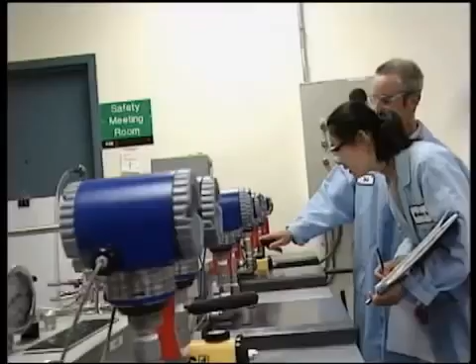One company stands above the rest in creating the technologies and the products needed to solve these challenges. My name is David Koch, and I'm the president of Koch Membrane Systems. For almost 40 years, KMS has been a leader in developing new membrane technology for liquid filtration in many different industries. Over the years, we have grown to a size approaching $100 million per year in sales and 500 employees.

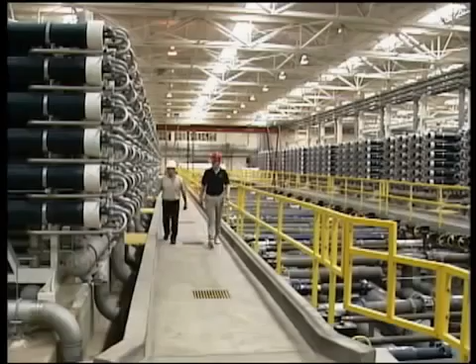In the mid-1990s, we identified water and wastewater treatment as a key growth area and invested accordingly, both through in-house research and development and through acquisition. KMS has a long history of providing innovative and highly economical products for water and wastewater treatment.

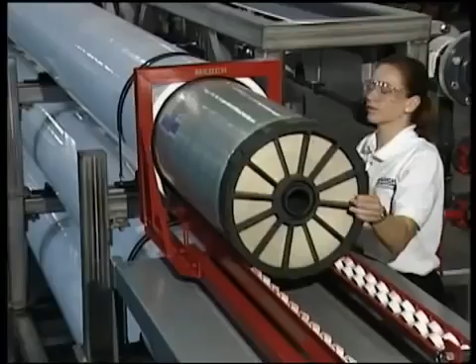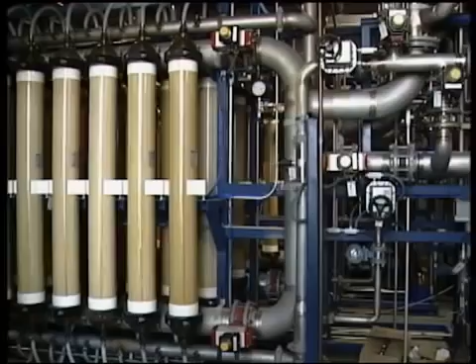For example, we recently introduced the Mega Magnum reverse osmosis element, which significantly reduces the cost of providing purified, desalinated water. Our hollow fiber ultrafiltration membranes, developed some years ago, treat raw water to provide safe drinking water and are also used to polish industrial wastewater for reuse.

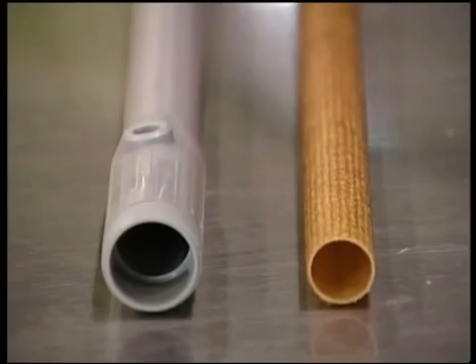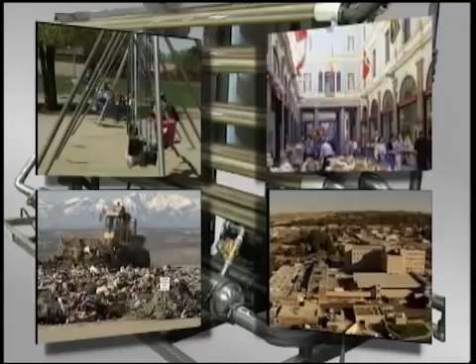KMS's well-proven tubular membranes are the membranes of choice for many challenging industrial wastewater applications. Since the 1970s, our tubular modules have been used in membrane bioreactors, or MBRs, to treat domestic waste from schools, office buildings, and shopping malls. We've also supplied tubular MBR membranes for landfill leachate treatment.

To meet this need, in late 2004, KMS acquired Puron, a young company based in Aachen, Germany. Puron was founded in 2001 by engineers associated with the University of Aachen, which is known for its development of membrane technology. In Puron, we found a company that has huge synergies with KMS.

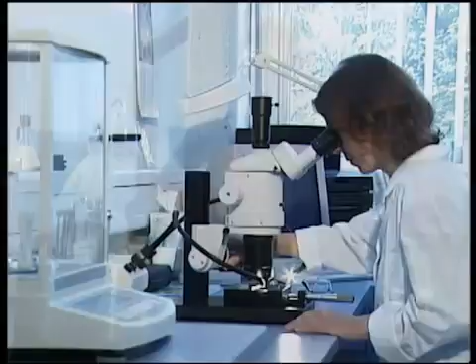The Puron technology is outstanding. It uses a submerged hollow fiber membrane module whose design is protected by a large number of worldwide patents. I believe it offers major advantages over other products in the market today. As will be explained in the film which follows, the Puron single header module design is much less subject to plugging and fiber breakage and uses far less energy than the double header designs. It is a proven concept with many commercial systems operating successfully.

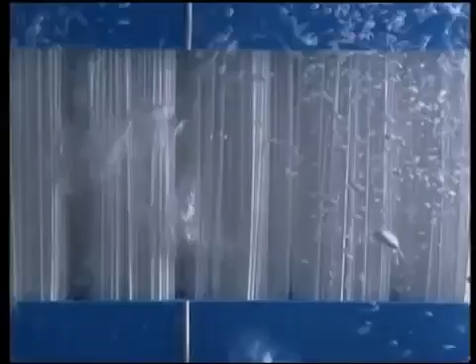With the Puron MBR product for wastewater treatment, the Mega Magnum RO element for saltwater desalination, and a hollow fiber ultrafiltration cartridge for raw water purification, KMS is the only filtration company in the world with a full range of membrane products for municipal and industrial water and wastewater treatment needs.

Our sales force is fully trained to discuss the performance of all of these products. We hope that you will enjoy this film, which explains the many benefits of the Puron technology and shows why we believe it is certainly the most advanced and economical technology for purifying municipal and industrial wastewater.

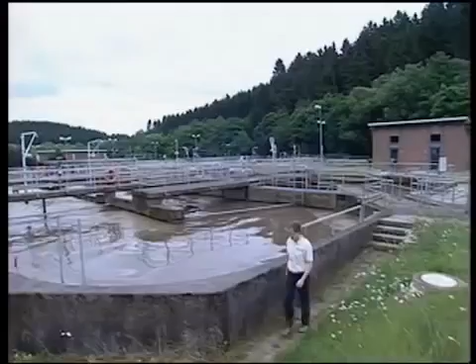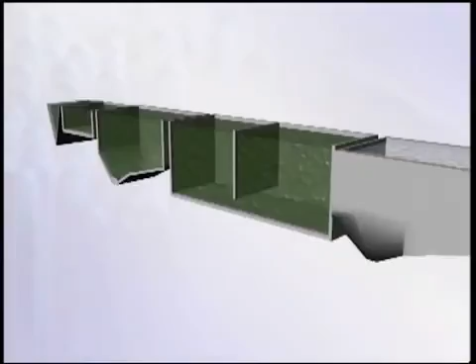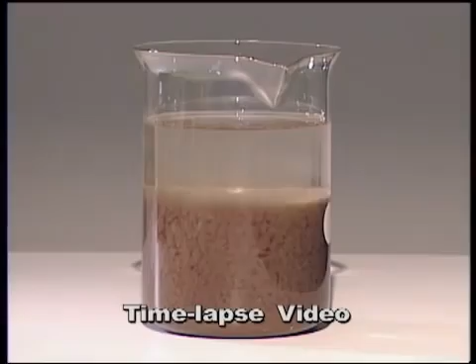Wastewater treatment needs are enormous. Wastewater treatment will play an incredibly important role in accommodating future water demand. Conventional wastewater treatment consists of 3 steps: primary treatment, biological treatment, and solids-liquid separation. The crucial part of the process is the solids-liquid separation. With a conventional sedimentation process, there is often insufficient removal of bacteria and suspended solids. For example, in 1 liter of typical secondary effluent, there are 10 million bacteria, which can be difficult to remove.

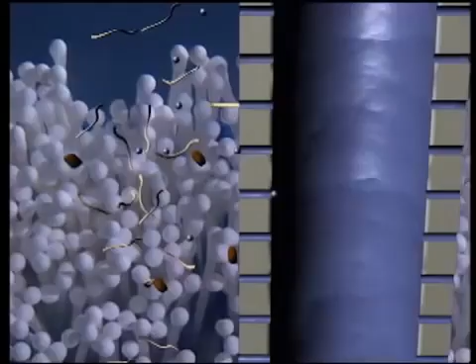The solution is here. Membrane technology has led to a new revolutionary concept in wastewater treatment. Membranes act as a barrier to bacteria and suspended solids to produce a low turbidity water with very low bacteria counts. Membrane bioreactors, simply called MBRs, offer the optimum solution. The membrane modules are submerged in the activated sludge to combine the biological step and the solids-liquid separation into a single process.

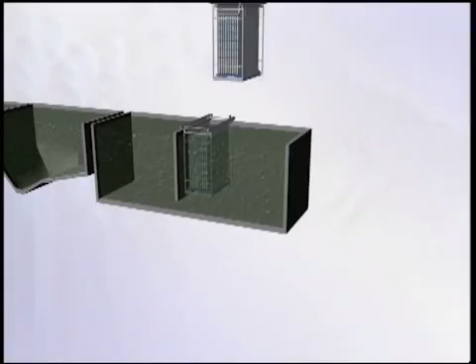Since the membrane acts as a barrier, this improves the effluent quality. Also, the membrane barrier eliminates the secondary clarifier and allows the activated sludge to be more concentrated. This reduces the volume requirement for biological tanks, thus saving space and money. When compared to conventional wastewater treatment, it's clear that MBR treatment is far superior.

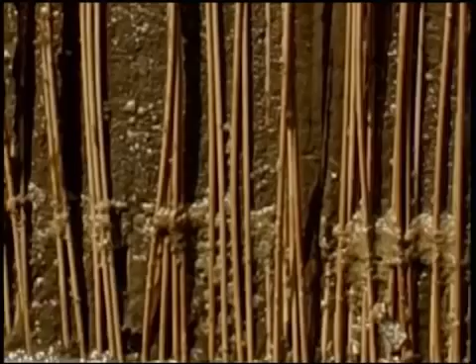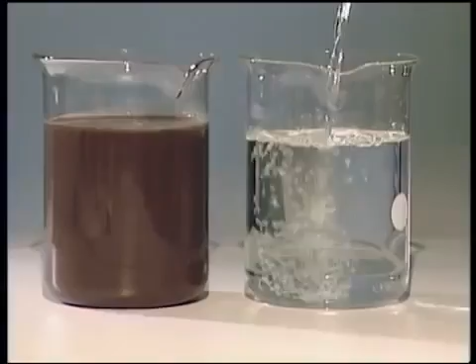Due to the tough environment in which the membranes are operated, membrane module design is of the utmost importance for successful operation of the MBR. The membranes extract clean water from the sludge, leading to dewatering of the activated sludge around the membrane module. This concentrates the solids surrounding the module and can lead to plugging of the module. An important feature of a good MBR system is a reliable method of flushing the solid matter out of the module to avoid clogging and sludging problems. Additionally, the module design needs to be able to handle hairs and fibrous material.

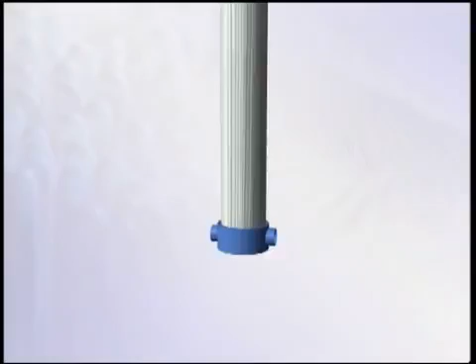The Puron MBR solution, naturally. The Puron MBR technology consists of hollow fiber membranes arranged in bundles. After biological treatment, the treated water passes from the outside of the fibers to the inside. The membrane, with a pore size of approximately 0.05 micron, provides a barrier to suspended solids, including bacteria.

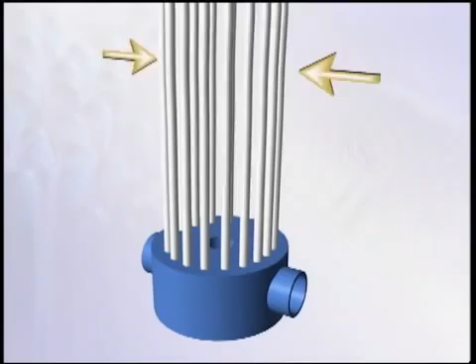The fibers are fixed only at the bottom and can move freely along their entire length. The top ends of the fibers are sealed. During normal operation, a vacuum is applied to the bottom of the bundles and water is sucked through the wall of the membrane. The solids remain on the outside of the module and clean water is drawn out through the inside of the hollow fibers into a single header. Aeration at the center of each bundle ensures that all solids, such as hairs, fibrous material, and sludge, are flushed out of the module.

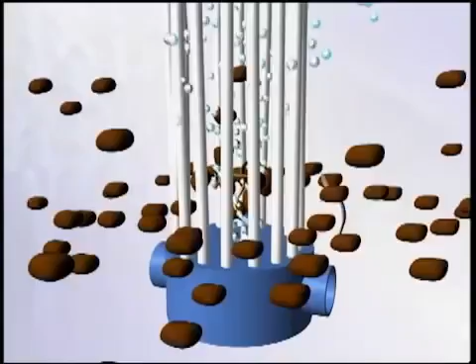Puron MBR technology solves the problem of clogging. Hairs and fibrous material can be a big problem for other MBR designs, especially for hollow fiber modules that use a double header design. Double header modules have a serious disadvantage compared with the Puron design.

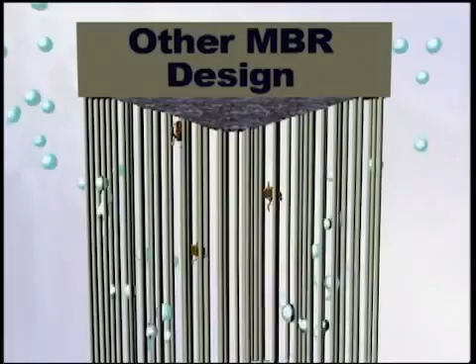When hairs and fibrous material within the sludge enter the membrane module, they float to the top due to air scouring. The upper header acts like a barrier or screen, leading to clogging. This reduces available membrane filtration area, affecting system performance, and the clogging leads to higher mechanical stress on the membranes, causing damage and shortening membrane life.

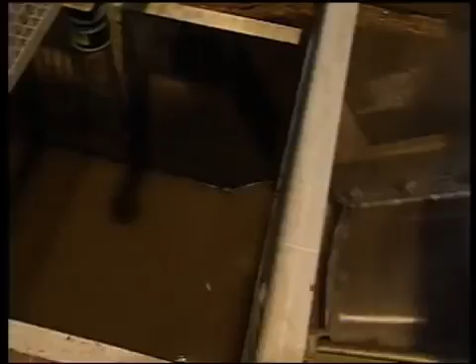To minimize these issues, double header products require very fine pre-screening, leading to higher capital and operating costs. Puron technology provides a simple solution.

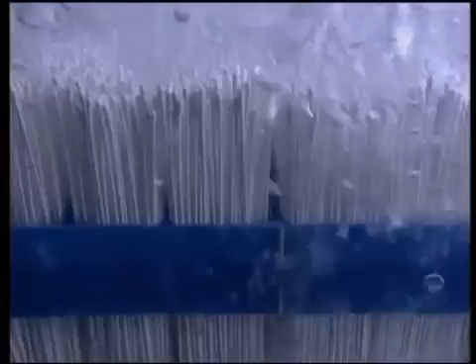It's the single header design. The Puron single header allows hairs, sludge, and fibrous material to be easily removed from the top of the module by simple intermittent air scouring, eliminating the risk of clogging.

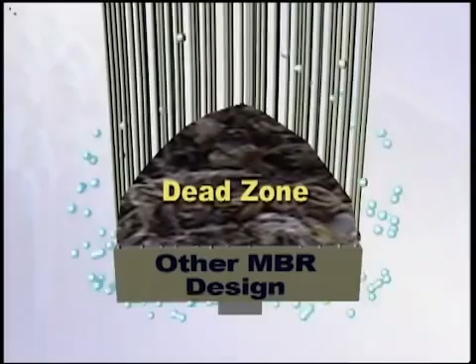What about sludging problems? Another issue with many MBR modules is sludging. Sludging occurs in dead zones where the air does not reach the membranes. This is often the case for double header modules, as they mostly supply the air from below the bottom header.

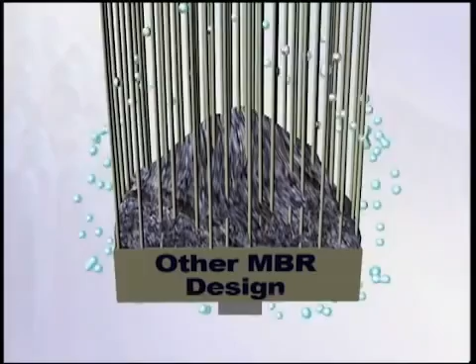When the air is supplied below the bottom header, much of the air bubbles around the outside of the membrane module and does not reach the interior fibers of the module. This allows sludge to settle, leading to fouling and sludging of the module.

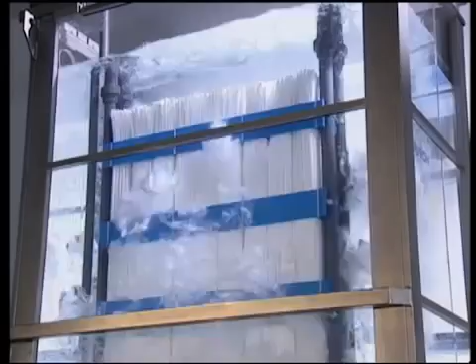A unique way to combat this issue is the central aeration system of the Puron technology. Central aeration injects the air in the middle of the fiber bundles, right where it is needed to avoid sludging. In summary, the unique single header and central aeration in Puron modules, patented by KMS, allow for reliable, trouble-free operation.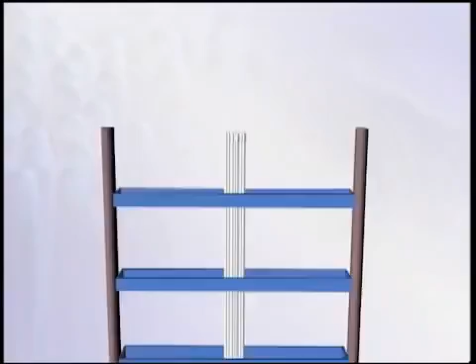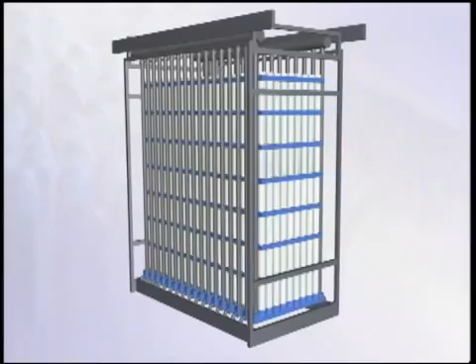The individual fiber bundles are incorporated into a simple modular design to create the full-scale membrane module. The bundles are arranged in rows, with the bottom headers connected together. Several rows are then mounted in a stainless steel frame to create the module.

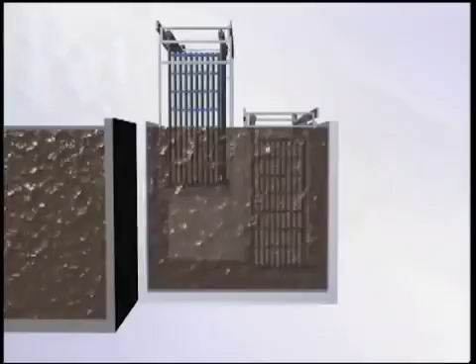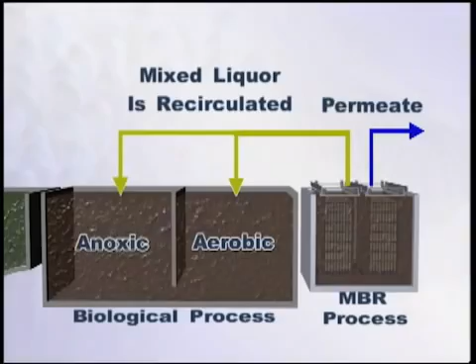The Puron modules can be submerged right into the biological treatment tank below the liquid level, or placed in a separate membrane tank. The advantage of a separate membrane tank is that the biological process and the membrane process can be optimized individually. The mixed liquor is recirculated back from the membrane chamber to the aerobic or anoxic zones of the biological process.

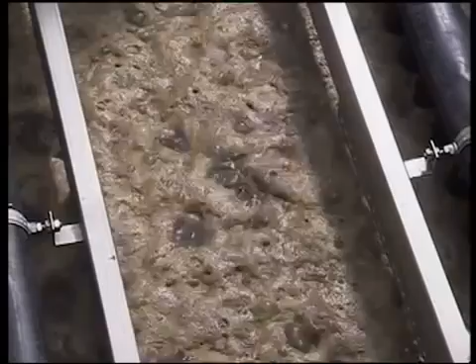At the municipal wastewater treatment plant in Simmerath, Germany, a Puron MBR system has been in operation since 2003. The system performance is excellent, and the membranes are still in perfect condition.

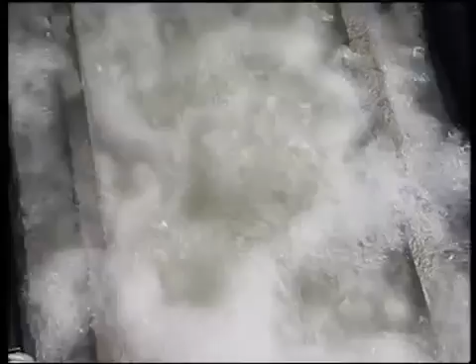It's easy to see that the Puron MBR technology has many advantages. High effluent quality: Puron MBR effluent is very high quality and meets strict discharge regulations, and can be reused for industrial applications, irrigation, or even as a step in a potable reuse scheme.

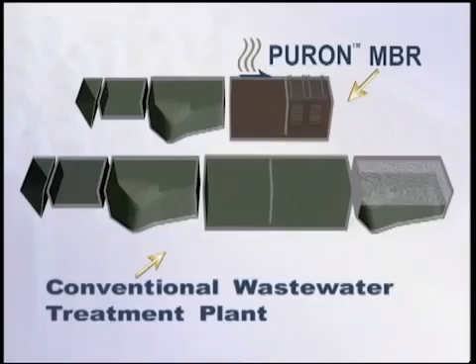Small footprint: Puron MBR systems need only about half the footprint of a conventional wastewater treatment plant. This provides great capital cost savings, whether for a plant upgrade, a plant expansion, or a new plant. The capacity of an existing plant, for example, can be increased without requiring additional footprint.

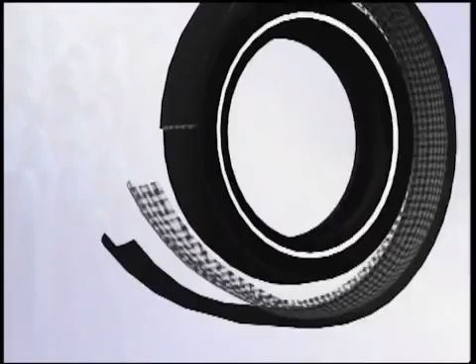Long membrane life: the Puron hollow fiber membranes are reinforced with a multitude of very fine, solid fibers woven into a hollow tubular configuration. The membrane is then cast onto this structure, which makes it extremely strong and gives it a very long membrane life. Automotive tires are reinforced in a similar manner to give them their extraordinary strength and lifetime.

Low energy consumption: central aeration optimizes air usage by putting the air where it is needed. This dramatically lowers the energy needed for air scouring, by as much as 25 to 50% of the energy required for other MBR modules. High and stable flux.

The Puron single header design results in reliable operation at high and stable flux rates. Simple pre-screening reduces investment costs. The Puron single header design and central aeration allow for selection of economical types of pre-screen.

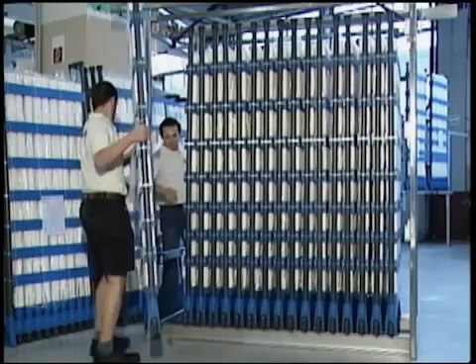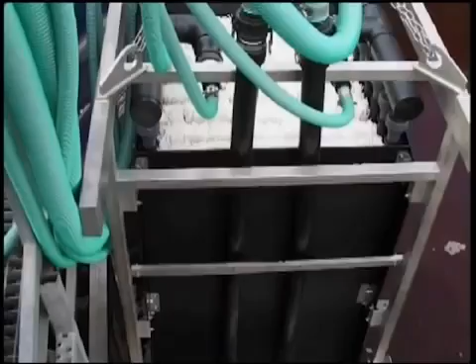Puron MBR modules are the best choice in any MBR application. They are available in standard sizes of 235 square meters and 500 square meters, or can be customized to retrofit any existing conventional system. If a customer is dissatisfied with their existing MBR modules, the improved Puron design can also be used to retrofit earlier generation double header systems to improve operating costs and reliability.

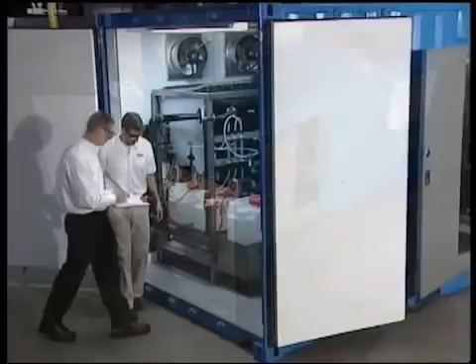Successful MBR operation not only relies on module design, but also on system design and operational concepts. KMS therefore not only offers Puron MBR membrane modules, but also associated components and a complete engineering package for the design and construction of an MBR system. If pilot testing is required, one of KMS's many high-quality, fully instrumented, fully automated pilot units is available for rental.

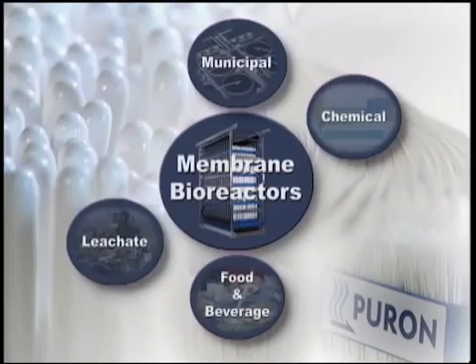MBR is used in many industries. MBR is not only used for municipal wastewater, it is used in many industries. Puron MBR solves many problems in industry, especially where large amounts of water are used and reuse is required, or where space is limited. For example, the Sobelgra Malting Company in Belgium needed to double production, but did not have the space to double conventional wastewater treatment.

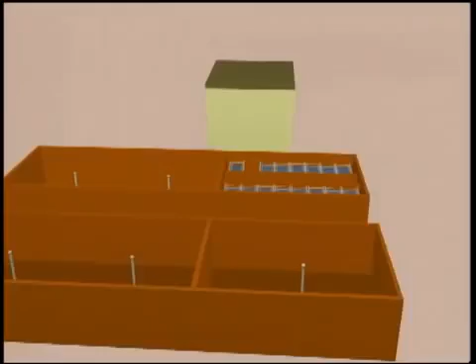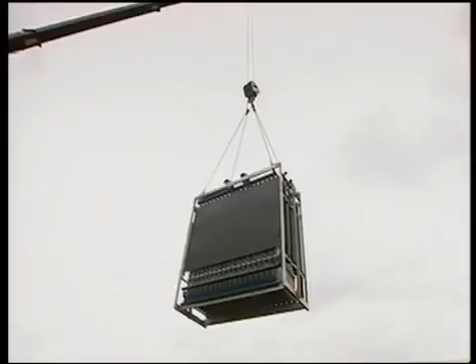The installed MBR system treats 2,000 cubic meters per day with 16 Puron modules, a total of 8,000 square meters of membrane area. This Puron MBR was commissioned in November 2004. Not only did the Puron MBR system meet production needs, but it produced water that was over 10 times better than the effluent produced with the old conventional plant.

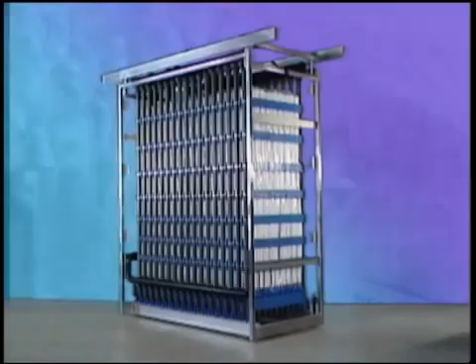MBR passes stringent regulations. There is a tremendous need for the Puron MBR technology. The need to treat wastewater to protect our freshwater supply and to recover water for reuse grows daily. Puron MBR technology from Koch Membrane Systems is here to help you solve all your wastewater treatment challenges.

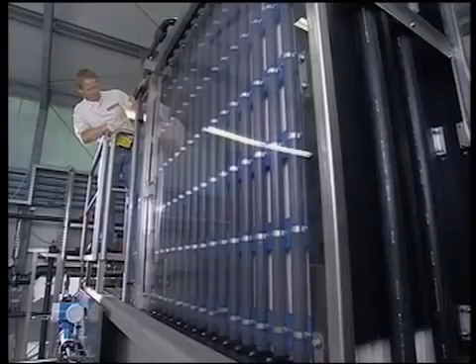Koch Membrane Systems has sales and service offices worldwide to support MBR applications. Puron MBR technology: the solution is here.